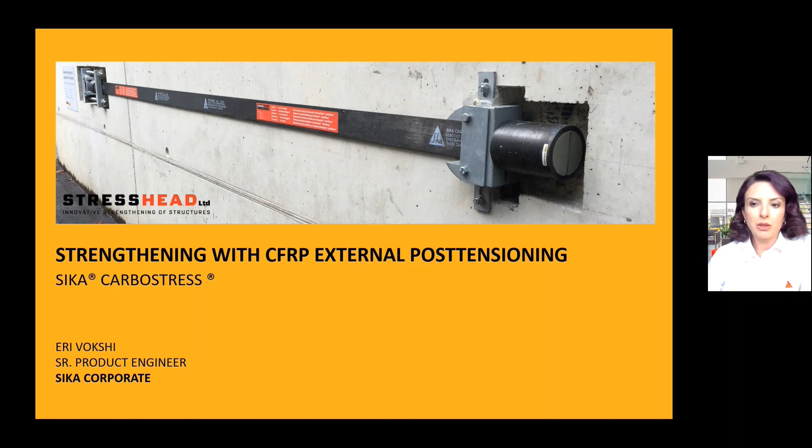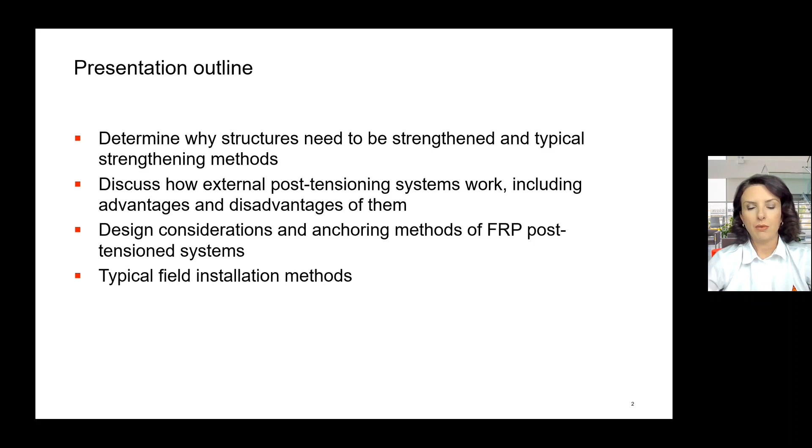A brief outline of what I'll be covering today: I'll talk about why structures need to be strengthened and typical strengthening methods available in the industry. I'll also mention how external post-tensioning works, including its advantages and disadvantages. Then I'll dive into the solution itself, the technology itself, which is post-tensioning with carbon fiber, the anchoring methods with it, as well as some really unique case studies from across the globe.

So why do structures need strengthening? As we start this discussion on why and where we use these products, let's take a look at our infrastructure report card that's issued by ASCE every year. The latest one was issued in 2021, and it paints quite a dim picture of our infrastructure. Currently, 42% of all bridges are at least 50 years old, and 7.5% of the nation's bridges are considered structurally deficient. That's pretty alarming.

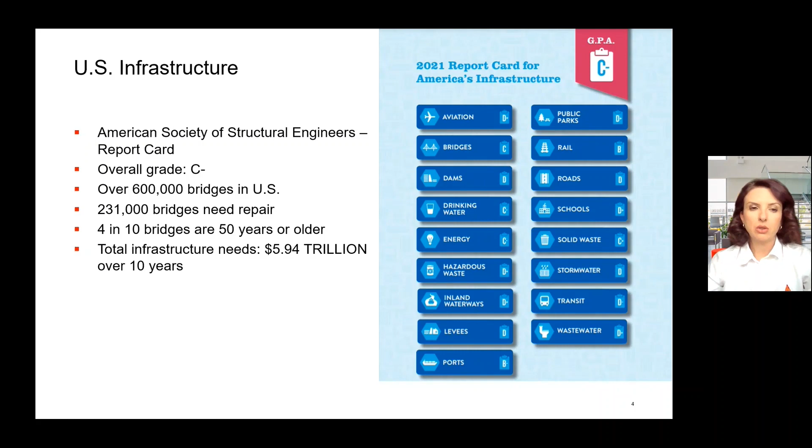The total infrastructure investment needed to address all these issues would be around $6 trillion over the next 10 years. But structural deficiency can take several forms. The most obvious one is weathering, but we can't forget the increase in demand on our bridges, for example—many need their capacity increased to meet today's traffic demands. Similarly, structures need strengthening due to a need to restore strength lost from damage or deterioration, increase load-bearing capacity, correct design errors, improve seismic performance, or even for blast hardening.

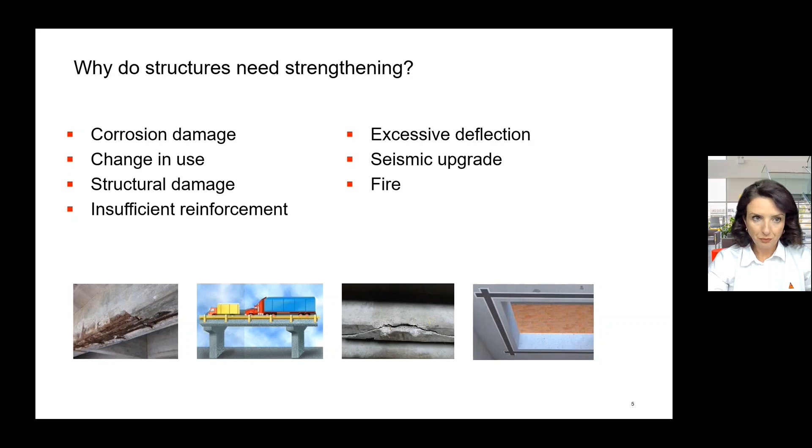The most typical strengthening methods used are externally bonded FRP systems or steel plates. I'd say this is probably the most commonly used strengthening method nowadays. Though a lot of it used to be done with steel, more than 80% has shifted to being done with FRP, which is exciting for our industry.

Then, of course, you have section enlargement, because there are limitations with FRP and steel—they're not always a good solution. Section enlargement is a lot more intrusive to a structure because you're adding a lot more weight to it, and it takes much longer to implement.

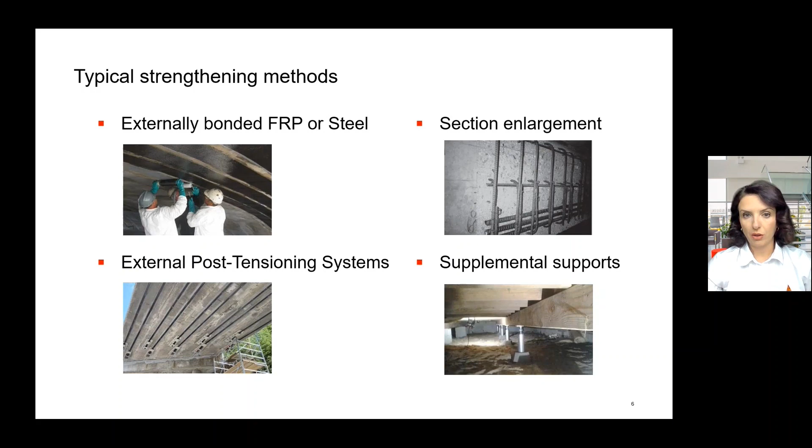Another strengthening method is external post-tensioning. This is the topic of discussion today. Traditionally done with steel, we're now introducing a technology where it can be done with FRP as well. And finally, supplemental supports is another strengthening method if all the others don't work. This is a bit more expensive, and sometimes, with limitations on space depending on where the structure is, it can be quite difficult to implement.

As we dive in to learn more about the PT system, I'll start with the basics by defining what an FRP is, since this technology falls within FRP offerings, and then we'll go deeper into post-tensioning with FRP. An FRP system is a combination of a fabric and a resin that form an extremely strong monolithic material, designed to share the load and stresses with the host substrate. Externally bonded FRP systems are, as the word describes, bonded, whereas post-tensioning can be bonded or unbonded—we'll talk more about that in future slides.

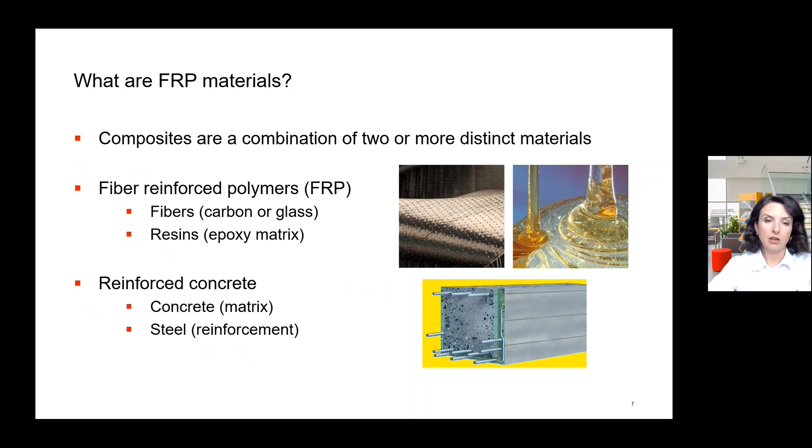Reinforced concrete is a composite itself—a combination of your matrix, the steel, the paste, aggregate, and all that good stuff. So when you're adding FRP to it, you're creating quite a complex system. Understanding how to properly design with it is quite critical and requires an experienced and knowledgeable engineer to do so.

So there are a variety of strengthening FRP products in the market, many of which are unique to Sika. I'll start by giving an overview of all of them. The most commonly used one is probably the wet layup systems.

These are the carbon fiber fabric systems that are installed when the fabric is saturated, and it's as the term says, wet. Once installed on a primed surface, it cures into a hard shell, giving the strengthening that's required.

Another strengthening FRP system is pultruded plates. These are carbon fiber plates that are very high strength and stiffness, manufactured in a controlled environment. They do have a bit of memory to them, hence pre-cured plates, so they're usually only installed for flat applications or bridge girders. The plates are also utilized for post-tensioning FRP systems, which we'll talk more about.

Another system worth knowing about is near surface mounted rods. These are carbon fiber rods that come in a variety of diameters and are usually preferred to be installed as a top surface application. We've used them for deck stiffening. The advantage is that they're not corrosive, so you can install them very close to the surface of your structure.

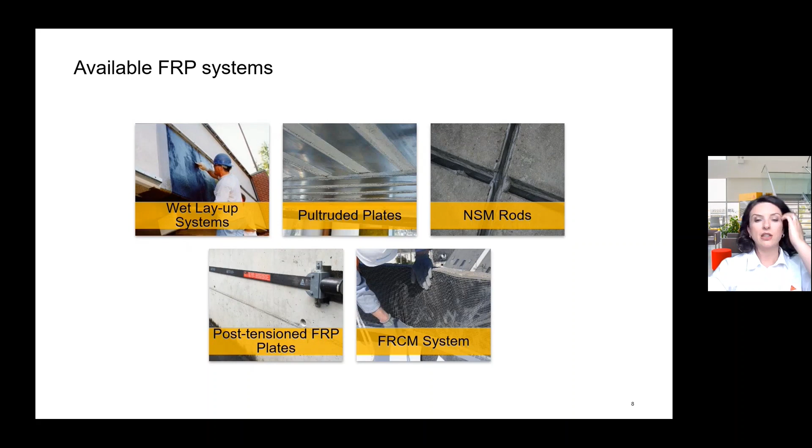Finally, worth mentioning is the FRCM system, which stands for Fabric Reinforced Cementitious Matrix System. This is a carbon fiber grid product that's embedded in a cementitious matrix. The advantage is that it's very breathable and can be installed on very large surfaces quite fast. It can also be installed on a pretty roughened concrete substrate, since you apply the mortar, then the carbon fiber grid, then finish it off. The disadvantage is that it provides less capacity compared to traditional FRP systems.

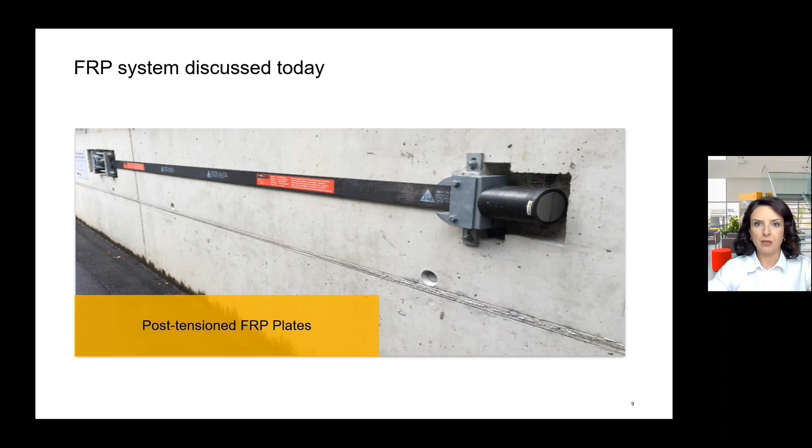Okay, on to our discussion about external post-tensioning with FRP systems. I'm going to start by comparing external post-tensioning versus traditional FRP systems.

When we're talking about externally applied FRP systems, we're referring to basically a passive strengthening method. What a passive strengthening method means is that once FRP is installed on a structure, the structure itself needs to see a new load for the FRP to engage and provide the strengthening that's needed.

External post-tensioning, on the other hand, to refresh your memory, provides active reinforcement. It involves usually attaching traditionally steel cables or plates to an existing member at discrete locations, then special anchors are designed to perform the post-tensioning, and the tendons or FRP plates are post-tensioned in the field to the desired force.

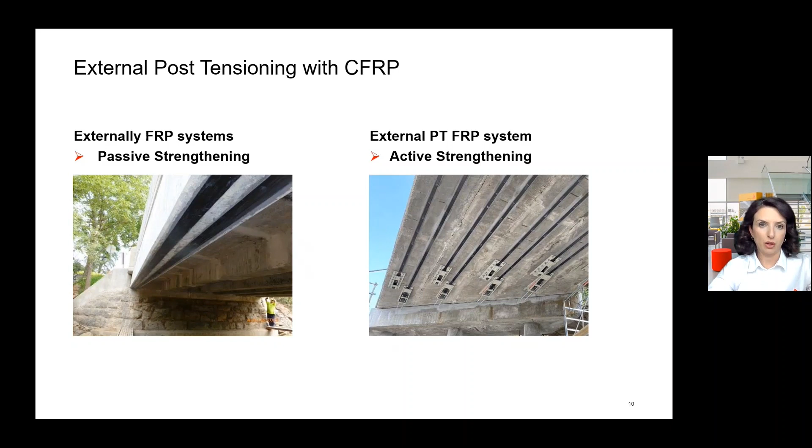What I mean by that is that with active strengthening, once the post-tensioning is applied or that force is introduced, it automatically relieves the stress in your structure, providing the additional strength that's required.

Because it is an active strengthening method, it does address deflection. With traditional FRP, though, we know that it adds some intrinsic stiffness to the structure, but it's really hard to quantify, and none of the design guides we have available provide guidance on how to address deflection with a passive strengthening method.

With an active strengthening method, this can definitely be done, as you're introducing a post-tensioning load to your structure.

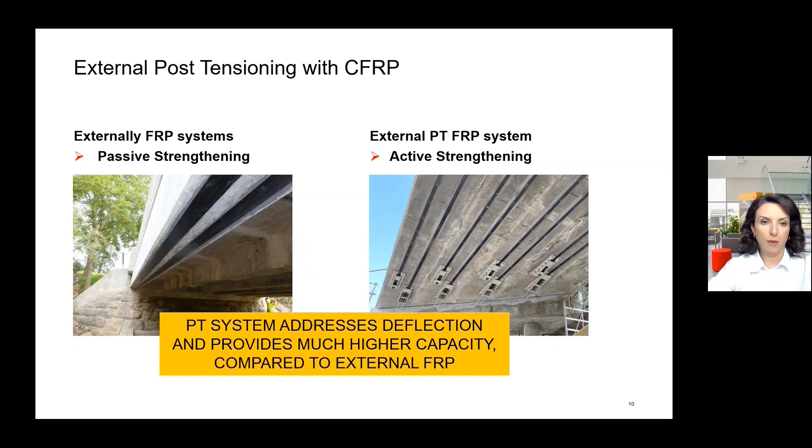All right, a few last words about external PT and the difference with FRP PT. As I mentioned, usually external post-tensioning was done with steel, and with anything else that's steel, it is corrosive. It's heavy, there's a lot of fabrication required, and it can be very high maintenance.

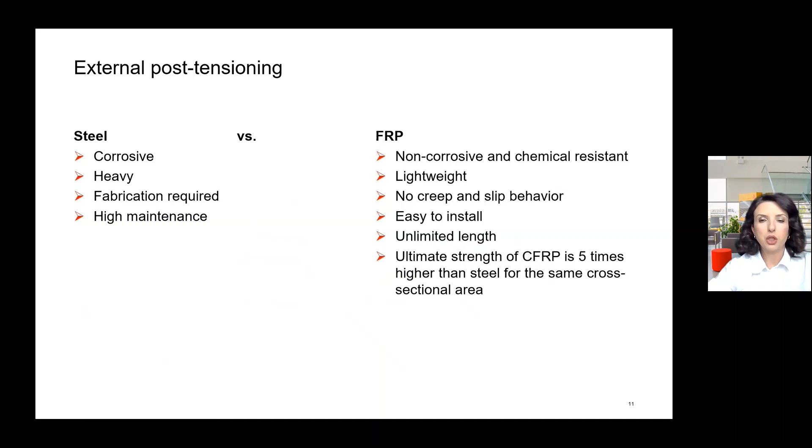Whereas with FRP, you're looking at a non-corrosive and chemically resistant material that's lightweight. We'll show some videos here shortly on how easy it is to install. We also have lots of testing that shows there's no creep and slip behavior, and the plates come in unlimited lengths.

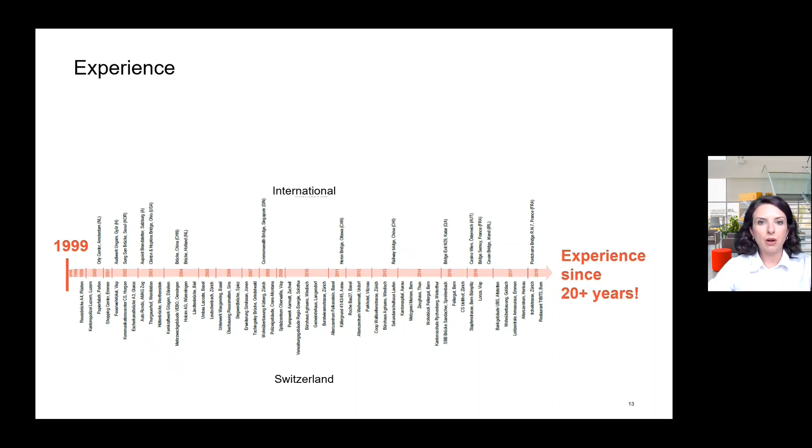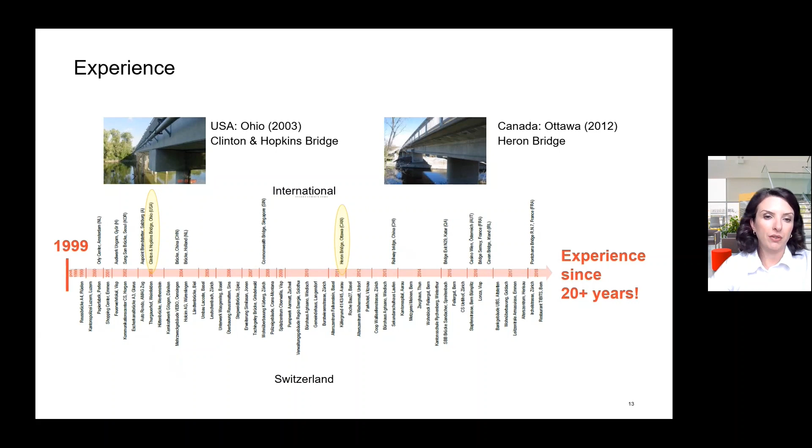All right, so let's talk about the CarboStress PT system. The system itself has been around for more than 20 years, mainly used in Switzerland. We have projects across the globe with it. We've done two pilot projects, one in the US and one in Canada, both successful, but the majority of the experience has been in Switzerland and other areas of the country.

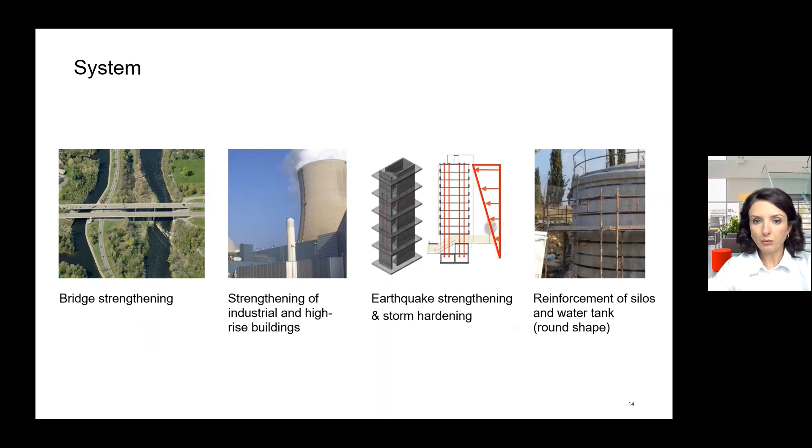The system can be used for many applications. The majority has been in bridge strengthening, but we've also done projects strengthening industrial and high-rise buildings, with lots of seismic strengthening applications, and also reinforcement of water tanks or silos.

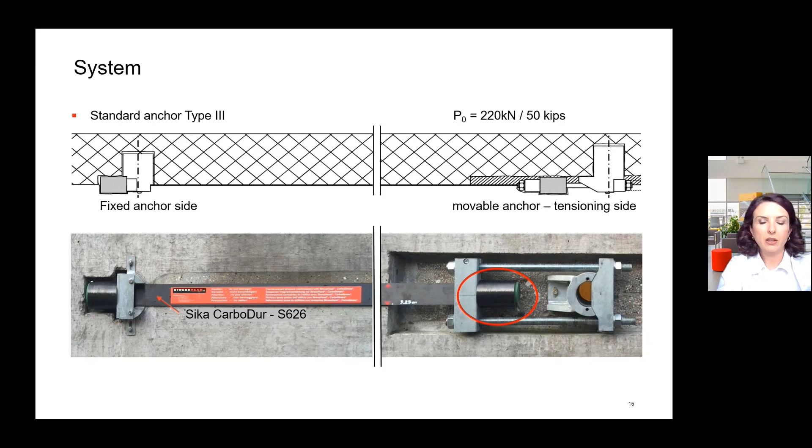The CFRP post-tensioning solution is very similar to a standard steel external post-tensioning system. It involves a fixed anchor side and a movable anchor side. On the movable anchor side, we usually install a hydraulic press behind the anchor, and with that we pull the head of the anchor backwards, introducing up to 50 kips of post-tensioning load.

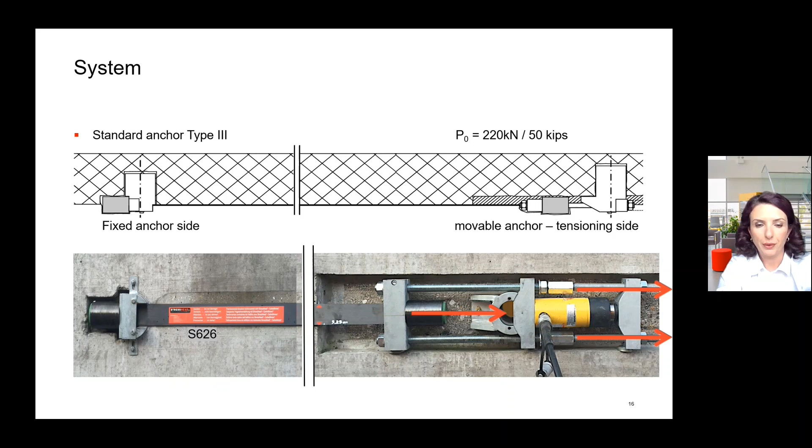There are several types of standard anchors we offer. The first is the one we've been showing in previous pictures, which we call our shear pin anchor. This is mainly used for concrete reinforcement, such as walls and ceilings, where you have clearance from the reinforcement, since it requires about 7.9 inches of embedment into the concrete. It's designed so that all the post-tensioning load is carried by the internal reinforcement of the structure itself.

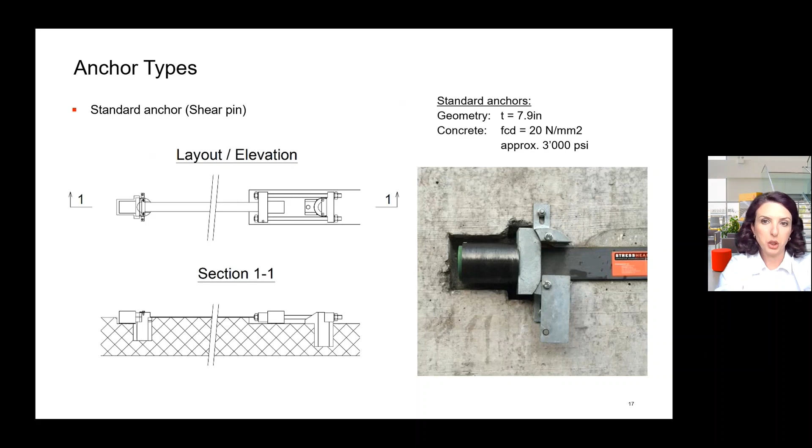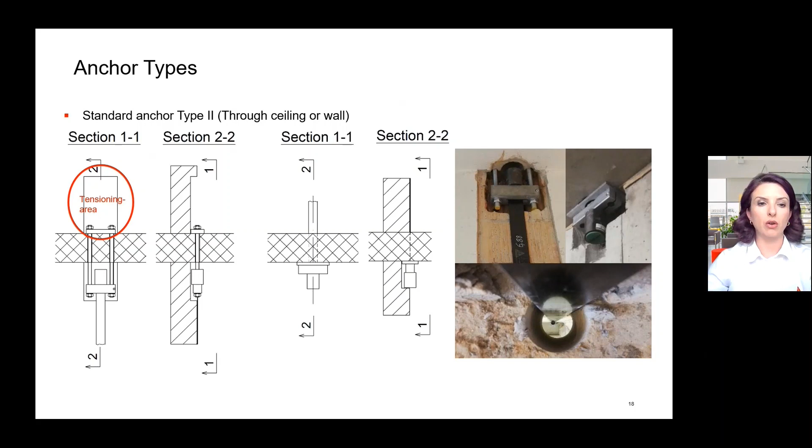Another anchor type worth mentioning has been designed for masonry walls, but we've also used it for bridge applications. In this case, threaded rods go through the slab and anchor the plate on the other side of the wall. The advantage is that the post-tensioning force is transferred into the slab instead of providing tensile stress onto the wall, without introducing compressive stresses onto the masonry wall. This is also applicable in some cases, for example for pier caps, where you might want to take the post-tensioning load on the side of the pier cap for ease of installation of the anchor heads.

We've had over 20 years of experience with this system, so we've come up with many different types of anchor heads for different applications. For example, this is a special anchor designed for areas with high reinforcement inside, where a U-channel type of anchor has been designed to go around a girder. We'll talk more about this case study later. All of the post-tensioning force is carried superficially onto the structure with a shear bar that goes through the beam itself.

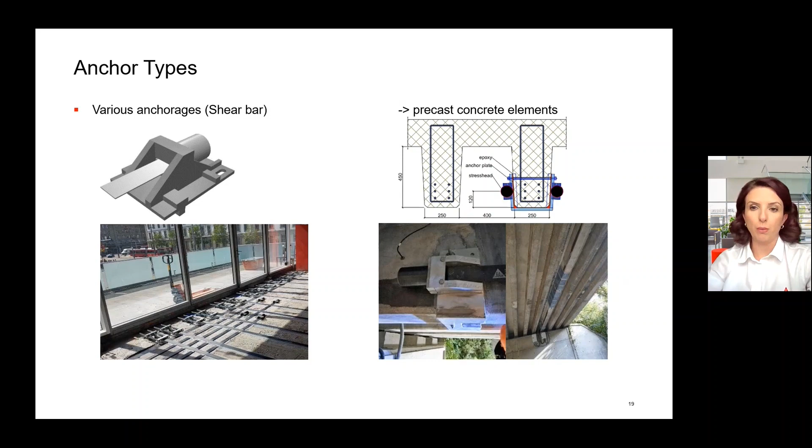The overall components of the system include the carbon fiber plate, the anchorage itself, which is the steel portion, and the anchor head, which is the proprietary part of this system. The anchor head is manufactured by a company in Switzerland called StressHead, and they're really the brains behind this technology. We work closely with them.

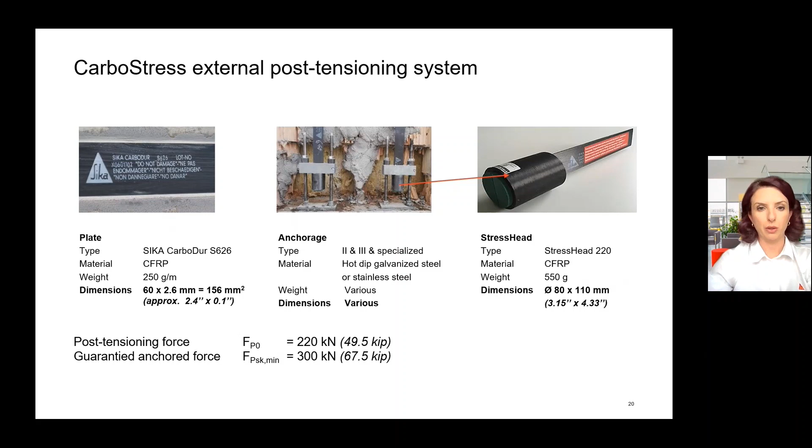The way we approach a project is: if you have something that might be a good application, you bring it to us for review, and we'll look at various anchors we've worked with previously. If none of them fit, we can always customize a solution so the system can be installed properly.

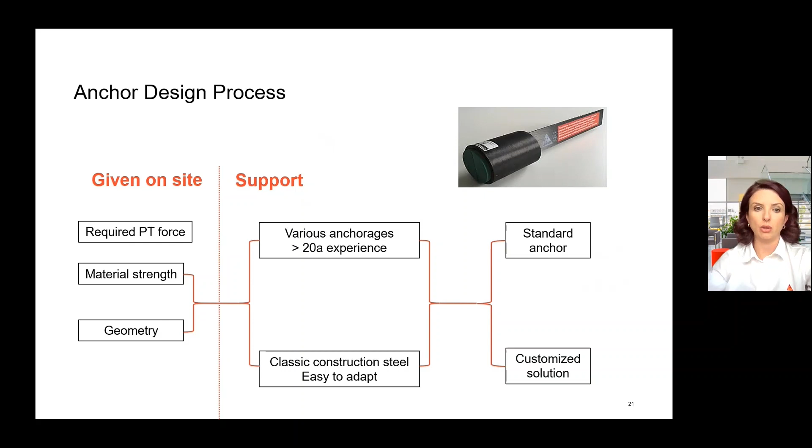The installation process is quite fast and very efficient. Basically, it involves drilling the area where the anchors have to be installed, chipping the section of concrete - for example, in the case of the shear pin anchor - installing the anchor, injecting it, and letting it sit.

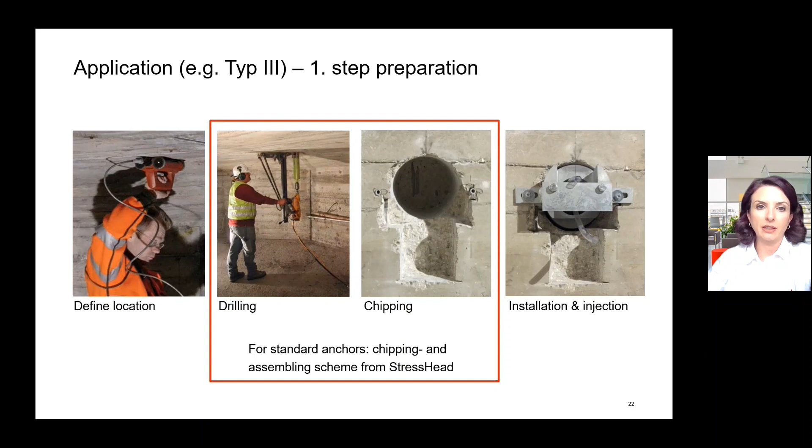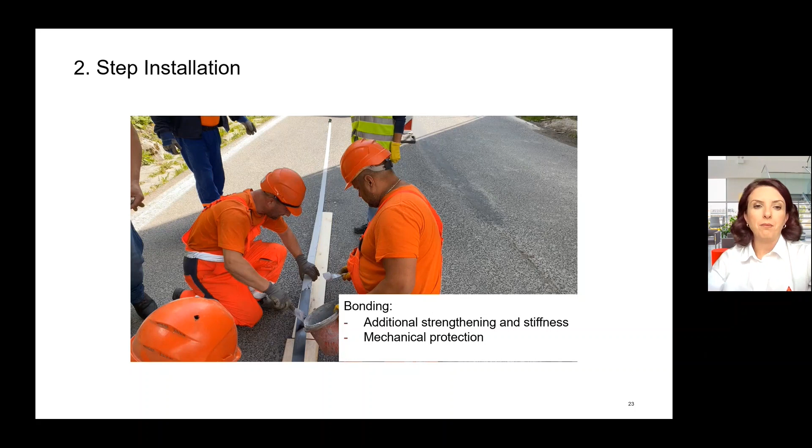The post-tensioning plate can be installed either bonded or unbonded. We usually recommend it be installed bonded for mechanical protection. In this video, you can see how the plate is being primed with an epoxy to be bonded onto the structure. This is very similar to Sika's plate system, if you're familiar with it. We do this for traditional externally applied FRP, and the same application is done here as well.

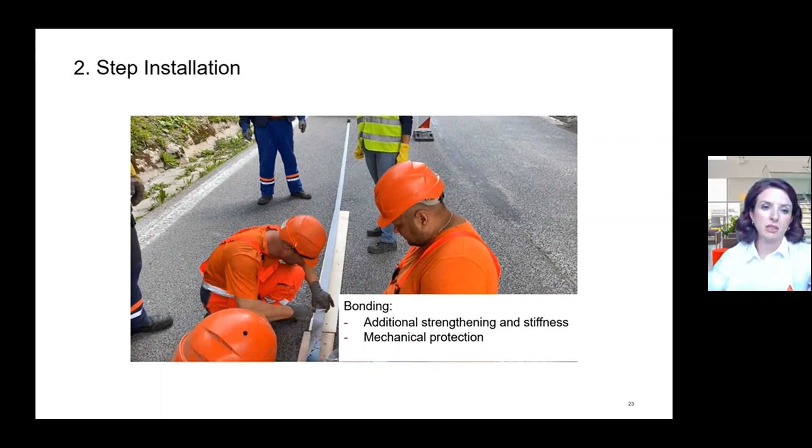We'll see this case study further in detail, but this video shows the simplicity of installing the plate. In this case, you can see the contractor installing the fixed side of the anchor, making sure it's bolted in properly.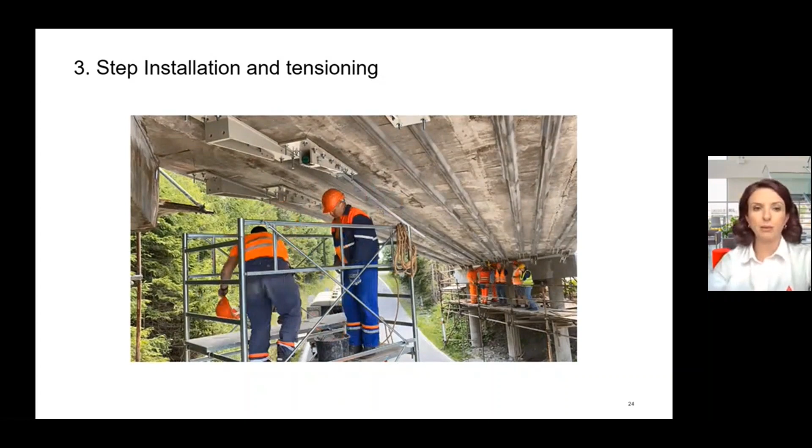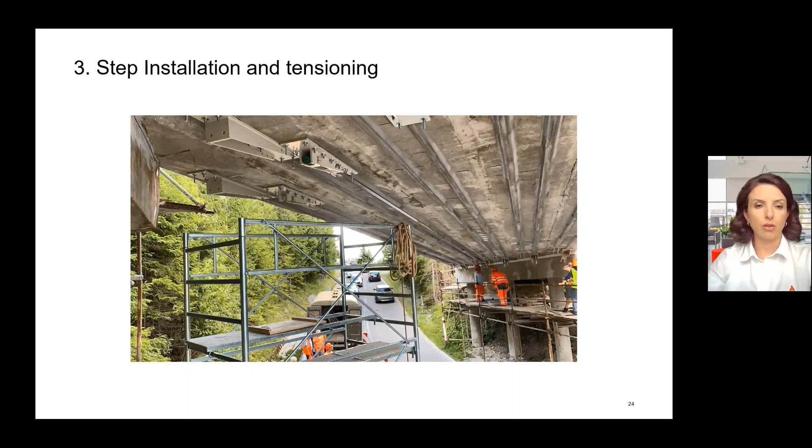And then on the other side, they've also anchored it in, and now the post-tensioning process starts. You can see continuously they're measuring the deflection on the plate to make sure that the post-tensioning forces are achieved. As I mentioned, the 50 kips post-tensioning load that we recommend is the maximum load, about 50% of the overall capacity of the FRP plate. So we have quite a bit of cushion in terms of the design with these systems.

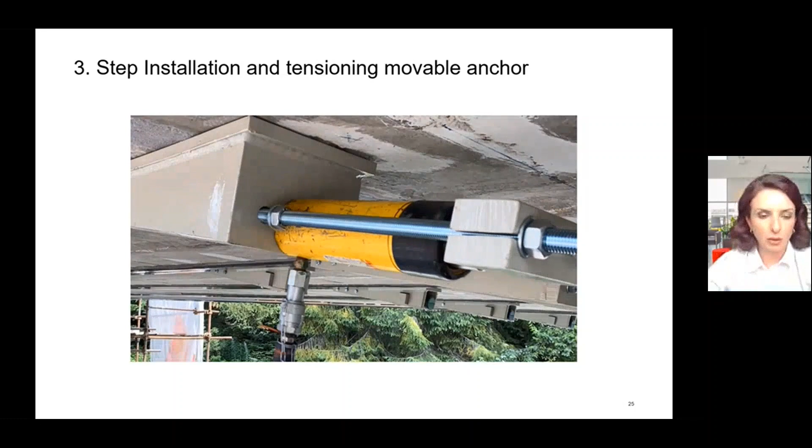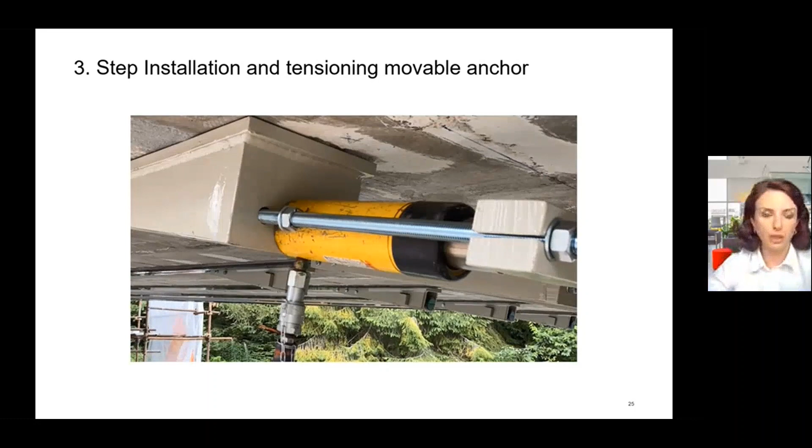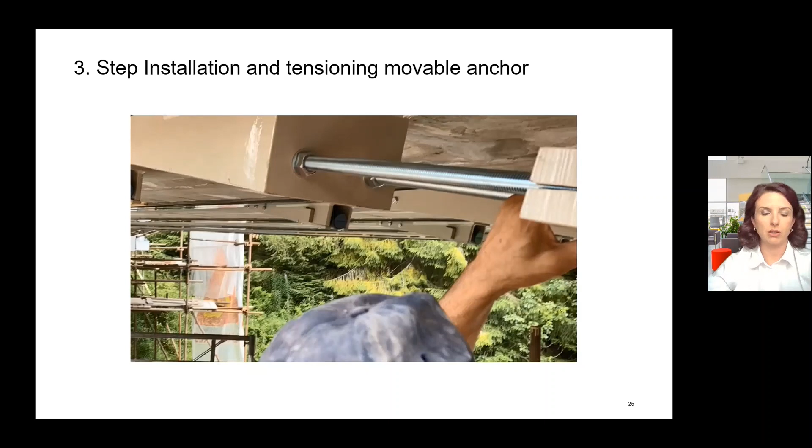Here's a close-up video of the post-tensioning process. You can see the hydraulic jack introducing the post-tensioning load onto the plate, and the two bolts on the side of the anchor pulling outward with the load. The process is done in multiple steps to make sure we're not exceeding the designed post-tensioning load. Once it's achieved, the bolts or washers are tightened in and the hydraulic jack is released, and that's it. The post-tensioning force is introduced to the structure and stays in place for many, many years.

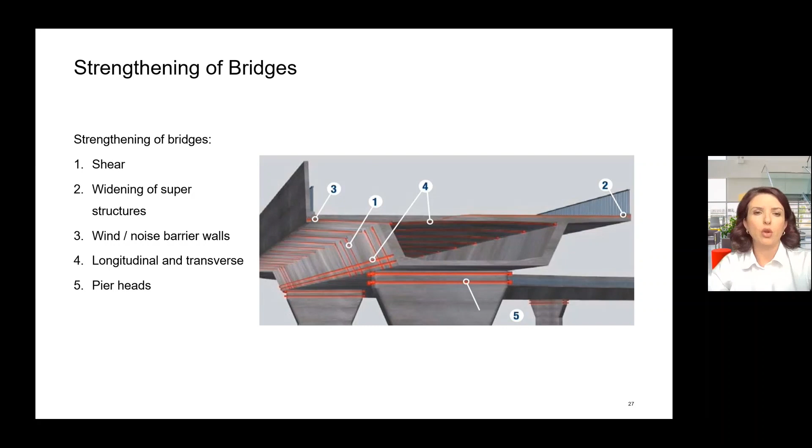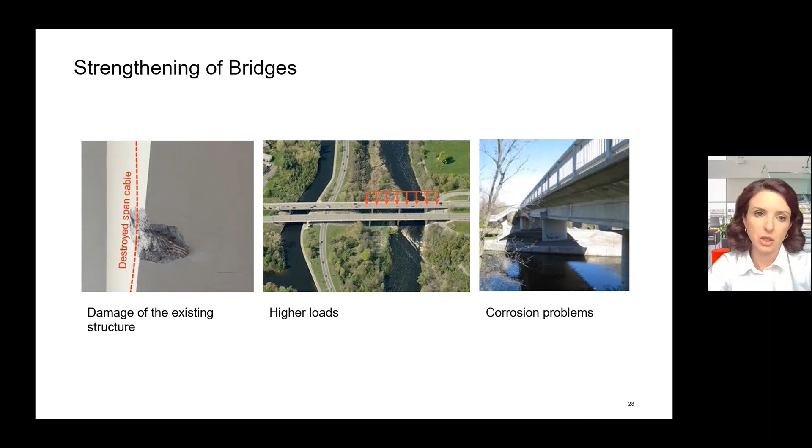All right, on to several project references. As I mentioned, the system can be installed for longitudinal and transverse reinforcement, as well as for substructure reinforcement. We've used them for shear, for noise barrier walls, pier heads, girders, etc. But the most common application, or the case studies I'll show here, are for damage to existing structures, usually for higher load requirements as well as corrosion problems.

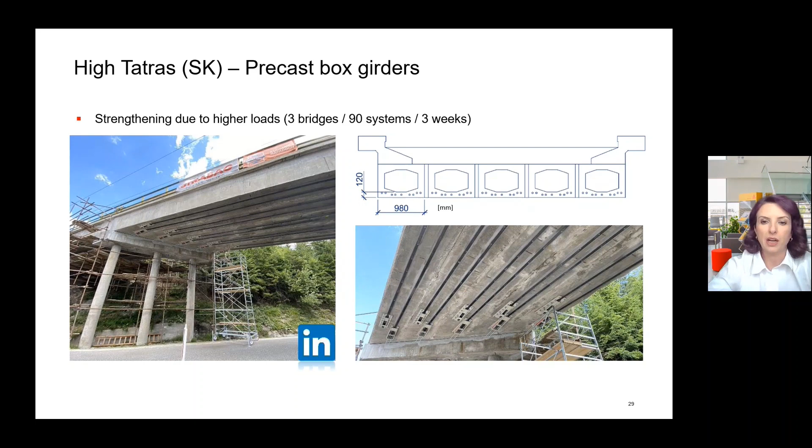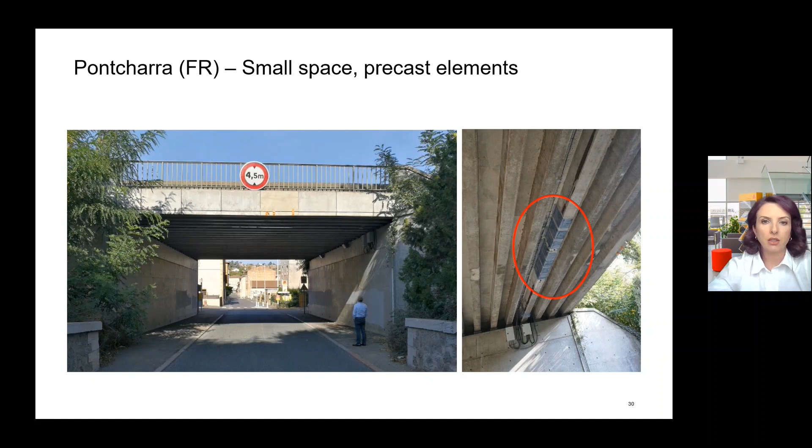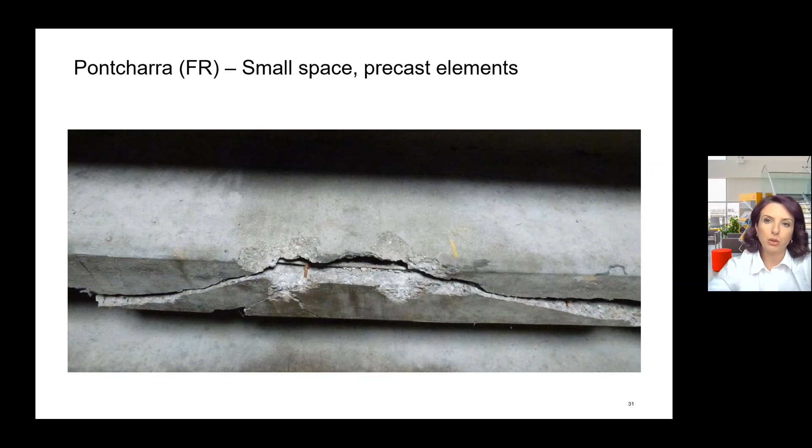Another project we're showing is one in France, where precast elements were hit by a truck on the bridge. The truck destroyed the entire beam along with the existing reinforcement, and the job was to replace the missing strength of the PT cable. This is when we utilized that special design anchor I talked about. There was not much space to work between the beams, as you saw in the pictures, so we had to be quite creative in coming up with a solution.

What we designed is a PT system that would go on both sides of the beam in case the cars hit it again, because many times bridges get hit in the same area, or the same bridge gets hit multiple times by trucks or cars. So in this case, we use what we call the shear pin anchor, where the PT stresses are introduced superficially to the concrete surface on the side.

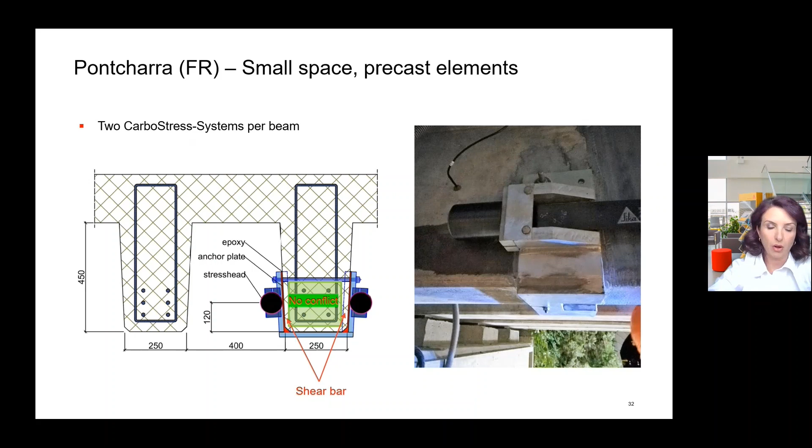There's a shear bar that goes about 1 inch into the surface of the concrete, but all of the PT load is carried through this anchor pin, which goes through the beams, avoiding all the reinforcement along the way. The post-tensioning here was done with two jacks simultaneously to achieve the proper reinforcement. You can also see we introduced U-wraps for shear strengthening of the girder, as well as to provide additional strength for the concrete itself due to the high post-tensioning loads being introduced at the ends of the beam.

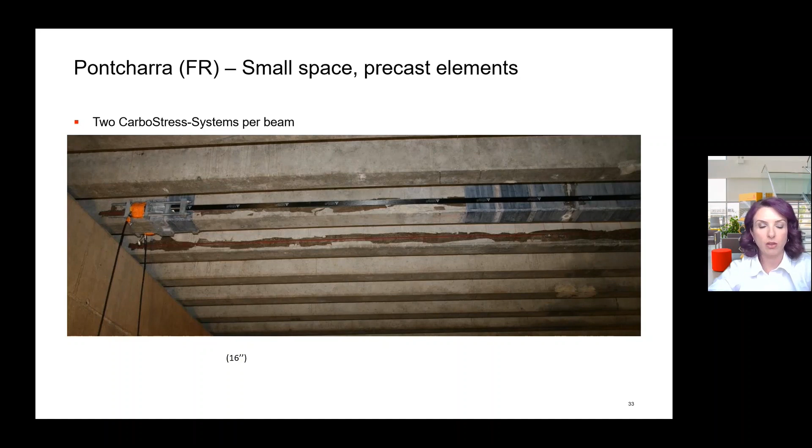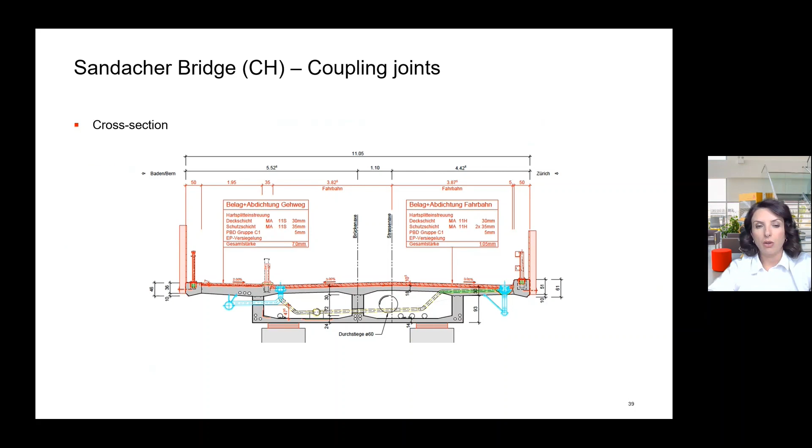Another bridge application, this is in Switzerland, where coupling joints were being damaged due to moisture. This particular bridge, designed and built in the 70s, was very long and included multiple coupling joints. Over time these joints started showing deterioration signs, which is dangerous because it could also damage the rest of the post-tensioning on the bridge.

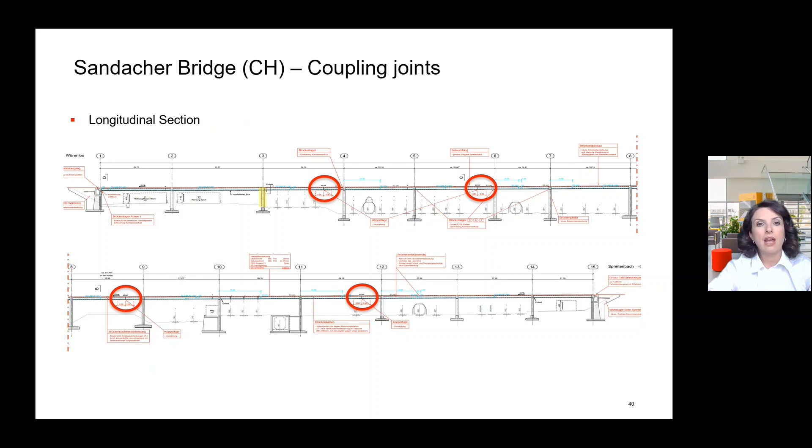Another limitation on this bridge is that it goes over major railroad tracks, as you can see in the picture here, so there had to be very limited disruptions during the repair process. The engineers decided to introduce the post-tensioning system around the joints to make sure they stay closed and tight after the repair, and to prevent any further deterioration in these areas.

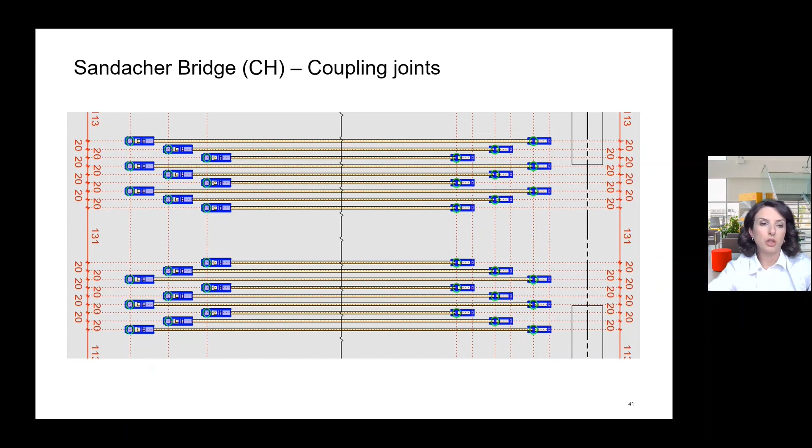In this case, we installed the post-tensioning system in a staggered method. The main reason behind this is so that the stresses are not concentrated in one area. And this was all done within a 2-day time frame.

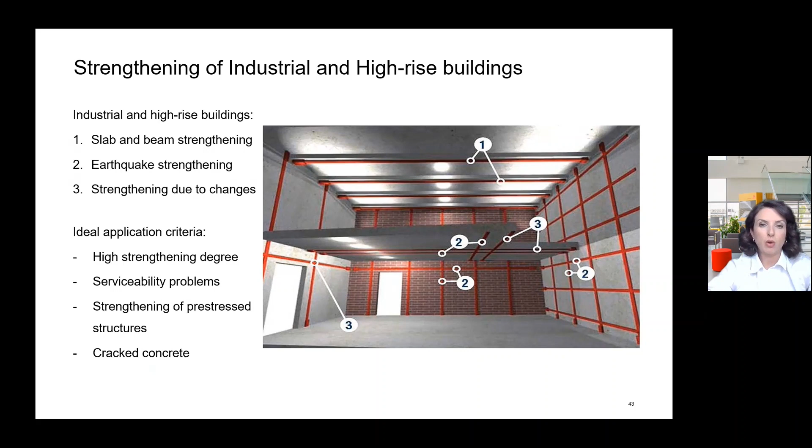Just to give you an overview, the post-tensioning system can be used for many applications, including buildings. I mentioned seismic, that's a big one, but we've also installed them on slabs, on beams, addressed serviceability issues, strengthening of pre-stressed structures, as well as general deterioration.

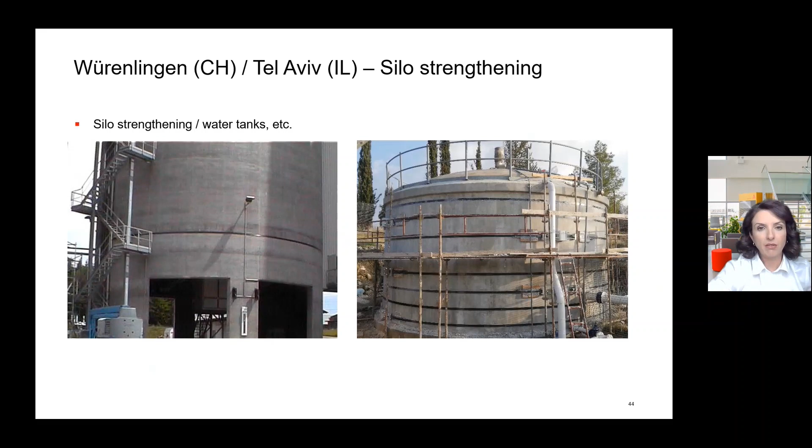Another interesting application is in silo or water tank structures. The picture on the right is a project we recently did in Tel Aviv. In this case, we tensioned an entire tank with 8 systems. You can see that the post-tensioning anchor side was tied together.

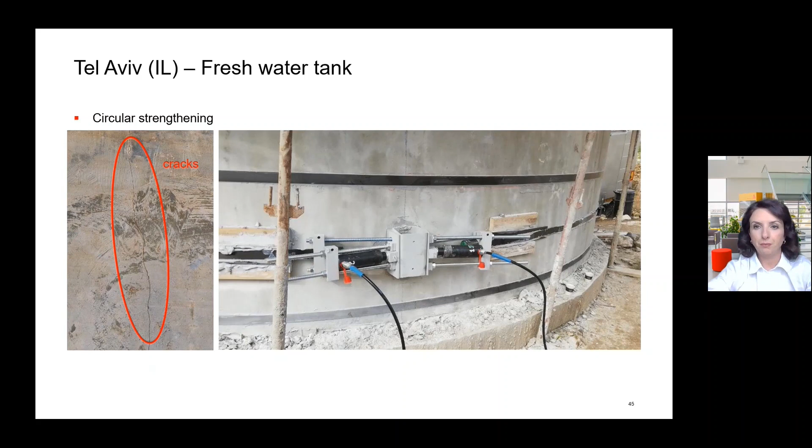This was a special design for this application, and the idea was that after the repair was done properly, the cracks would not further develop and would stay closed by introducing an external post-tensioning load. To avoid friction losses, we had to tension both sides at the same time.

Another application outside of bridges, addressing serviceability, was in Vienna, where a wall in a casino was removed, but there were still 2 columns that had to be addressed that were awkward in the room due to a change in use of the structure. Removing those 2 columns would have resulted in very large deflections of the slab, so the post-tensioning solution was utilized to prevent deflection and allow the columns to be removed.

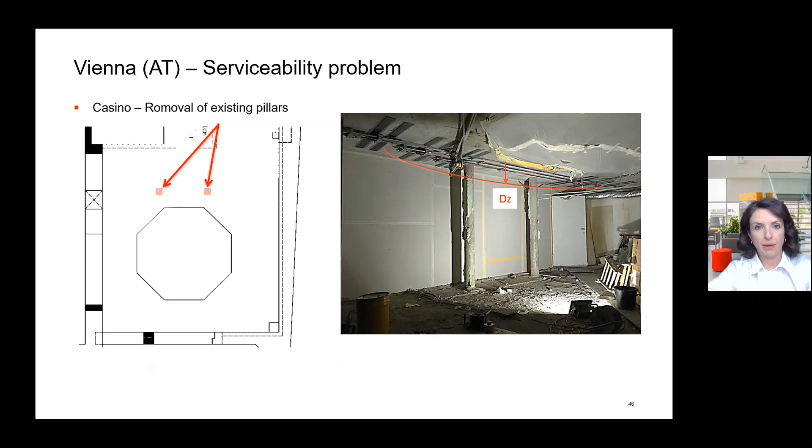This picture is right after the PT system was installed and before the columns were cut out to open up the space. Okay, last few words on design and tests.

We've done multiple tests at the University of Lucerne in Switzerland with different anchors, different slabs, and slab strengths. We've also performed fatigue testing for the entire system at the Milan Polytechnic Institute in Italy. We've also done long-term tests for the past 10 years to extrapolate up to 50-year creep and relaxation behavior of the system, and what we see so far is there is no loss of tensioning force over the years.

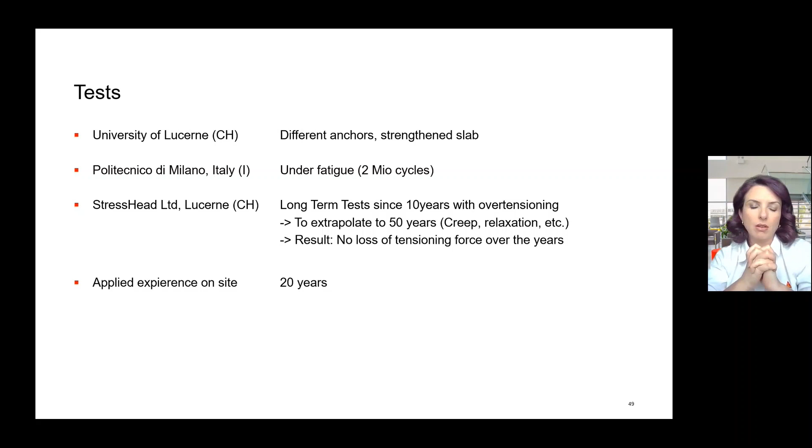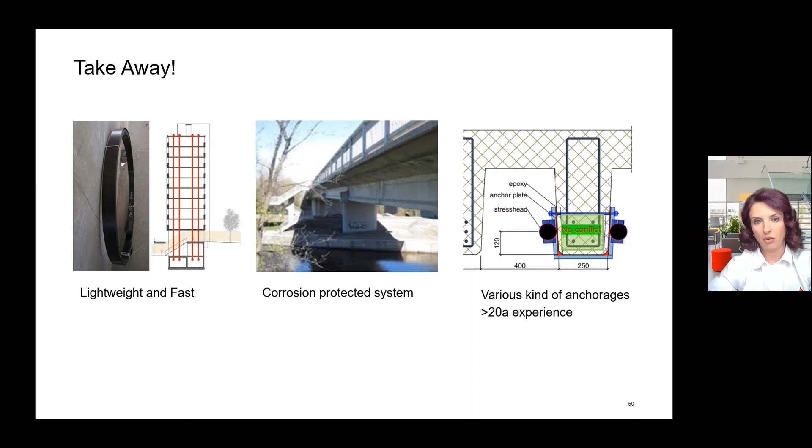As I mentioned, we've done projects for the last 20 years and have quite extensive experience with it. Hopefully, as you went through the presentation, you saw that the system is very lightweight and super fast to install. It's a corrosion protected system, so you don't have to worry like with steel about corrosion attacks. With more than 20 years of experience, we've developed so many different types of anchors that I'm sure we can find a solution for your next project.